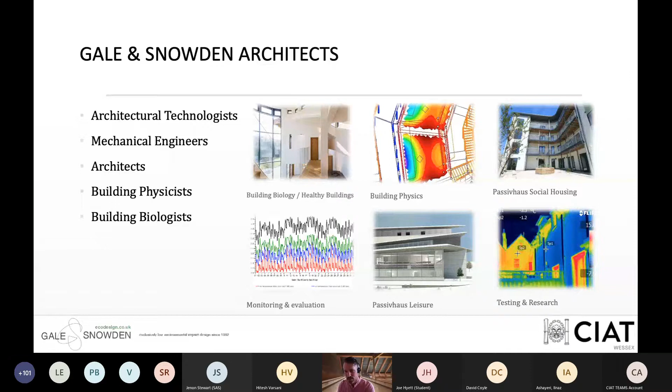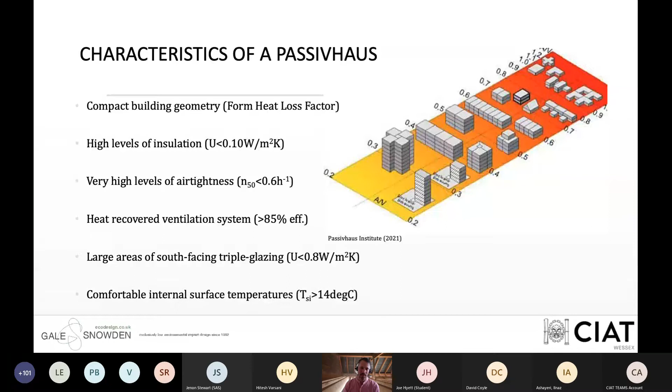High levels of insulation: we beef up the insulation, reduce those U values, and that reduces the transmission of heat. Very high levels of airtightness is a classic passive house requirement.

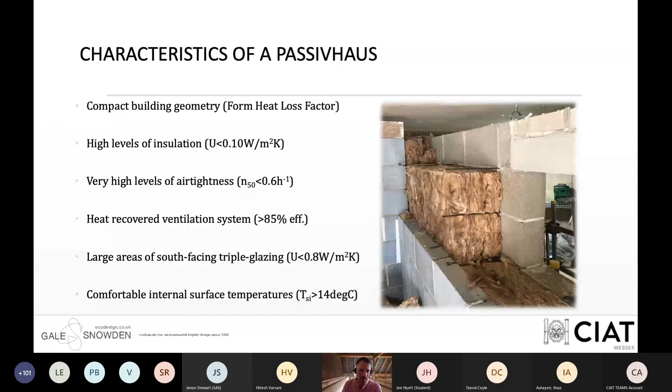So there's our insulation. This photo is taken at St Sidwell's Point, and you'll see 250 mil of insulation stuffed into a cavity. It's not an external wall, it's actually an internal wall that's insulated. It's part of the envelope, but that gives you an idea of just how much mineral wool insulation we need to achieve those U values.

To give you an idea of what 0.6 means in terms of airtightness, when we're looking at residential buildings, you might look at the area of five 20 pence pieces - that would be your typical air leakage in a house. With passive house, the equivalent area across the whole of the building would be a 5 pence piece, and that's all those little pinpricks, dots, tears, rips in your air tightness layer, which needs to be continuous around your building.

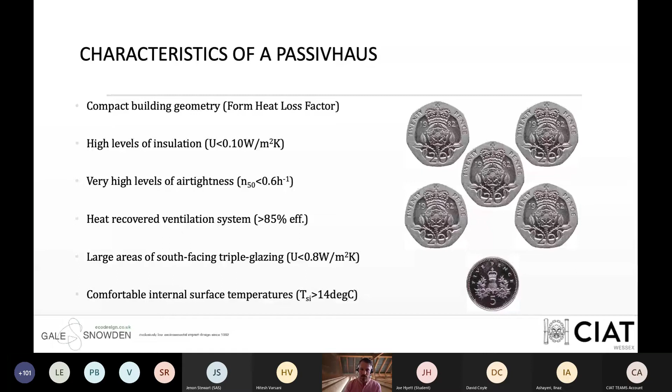MVHR systems, if you don't know already, they are the best technology in the world. In my view, they're just great. You take out some warm air, you take in some cool fresh air, you pass it over a heat exchanger, and you transfer the heat from the warm air that you're taking out from the wet spaces, and you put it into the fresh incoming air to the tune of 90% efficiency. So by getting that temperature gradient across the heat exchanger, you can transfer nearly all of the heat energy to your fresh air that's being supplied to bedrooms and bathrooms, to bedrooms and living spaces.

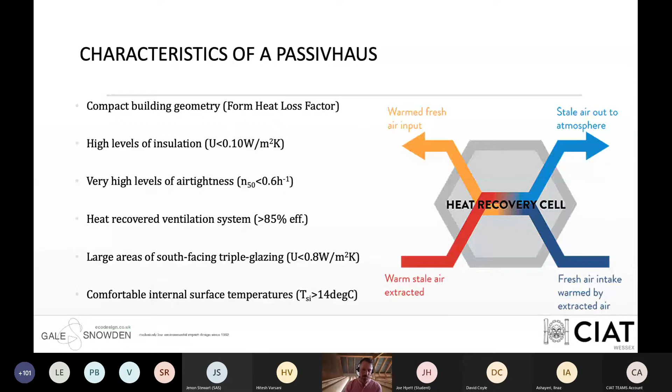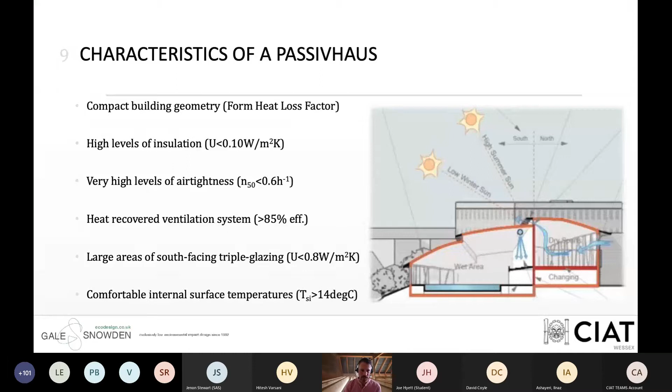South-facing glazing is critical in a passive house, and that's because within certain parameters for overheating, we are trying to get as much solar energy into the building as possible, and that also means reducing the amount of glazing to the north in the northern hemisphere. In the southern hemisphere, obviously it would be reversed, but large areas of south-facing glazing.

And comfortable internal surface temperatures - this is one of the thermal comfort criteria for the standard. It's also part of ensuring decent build quality, but what the Passive House Institute do is they split up the globe into a set of their own climate zones, and they say in this zone you need a minimum internal surface temperature throughout your envelope, and in this zone you need a different one. In the southwest, in the UK, it's about 14 degrees, and that varies from zone to zone.

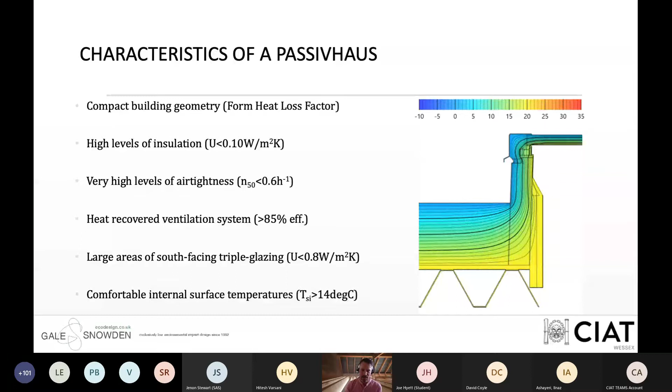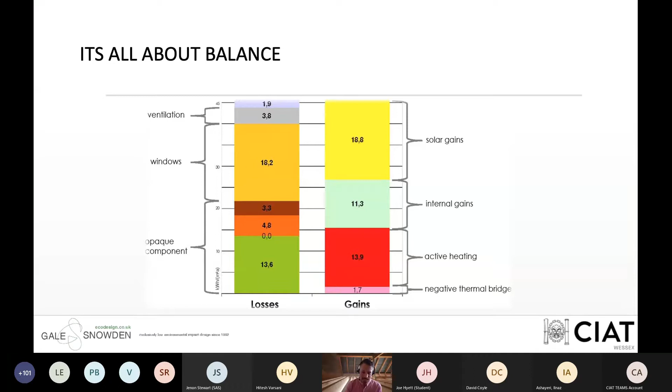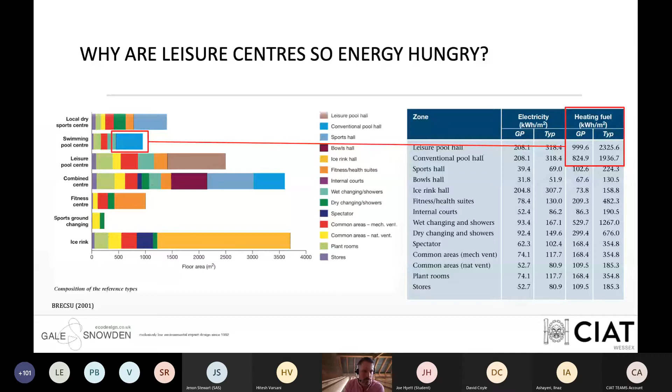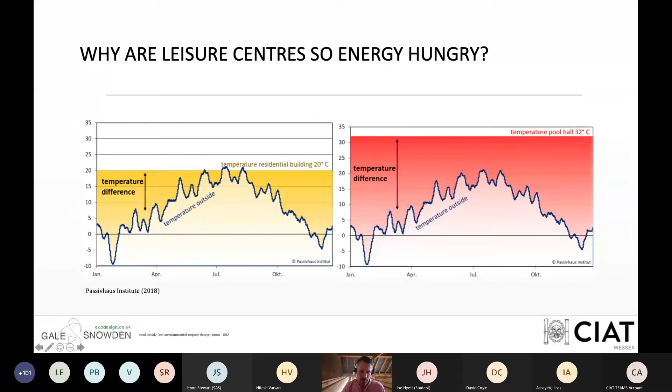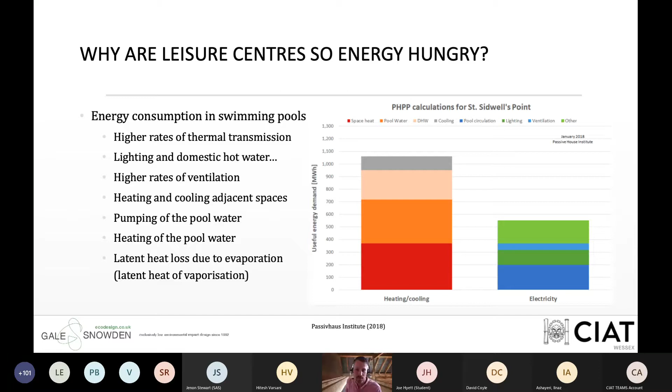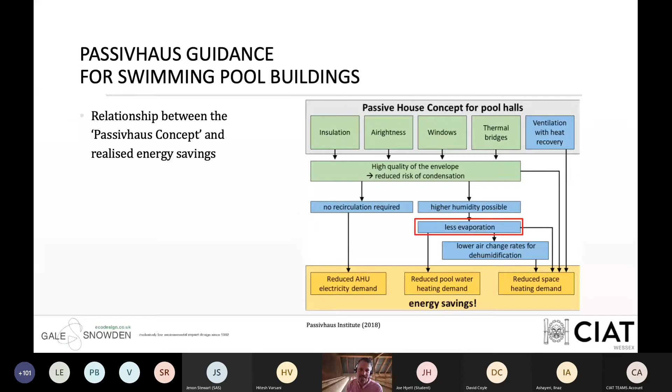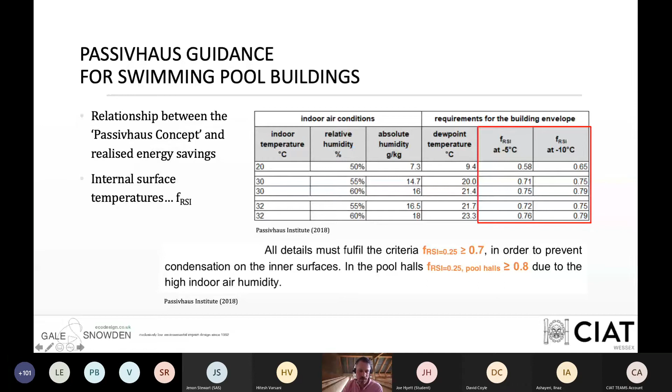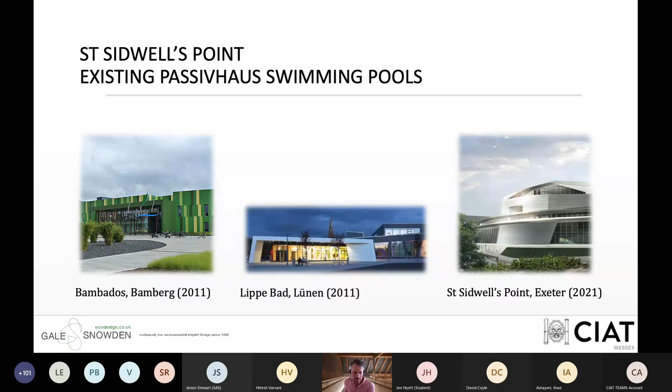St. Sidwell's Point's project value has been targeted at 36 million. To be honest, that's crept up from lower than that at pre-tender, and of course these things do inflate.

The team's client is Exeter City Council—we've done quite a lot of work in the past with Exeter—and Kier are our contractors. I'm not wanting to blow wind or anything, but both teams are epic, they're brilliant, and so far, though we're a few months off completion, they've just been really good to work with.

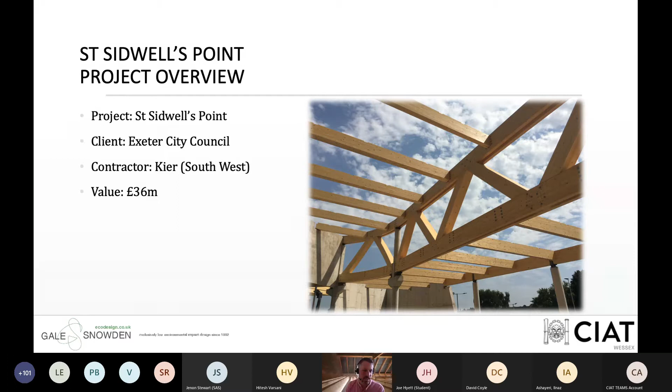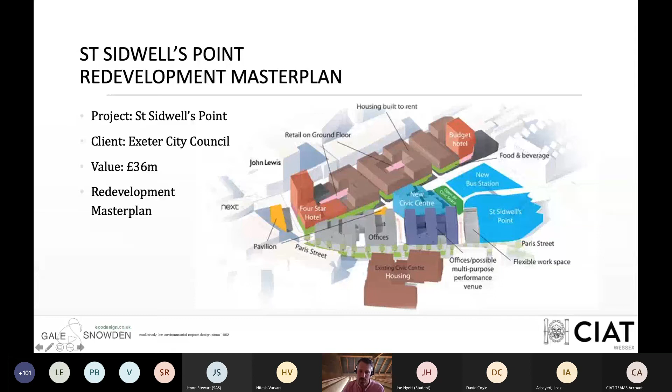Now, Passivhaus isn't the only environmental factor, and of course with standards like BREEAM, we have lots of different criteria and points, but Exeter City Council wanted a facility that was not just a benefit to the local community, but that would be a destination for people all around the country to come and experience for themselves whilst they're away or on holiday, so they can travel down and actually experience a building that's not just very comfortable to be in, but that's also healthy. And we're taking principles from the Institute of Building Biology and Ecology, but also a building that's going to really stand up against future climates of increased temperatures and increased wind-driven rain.

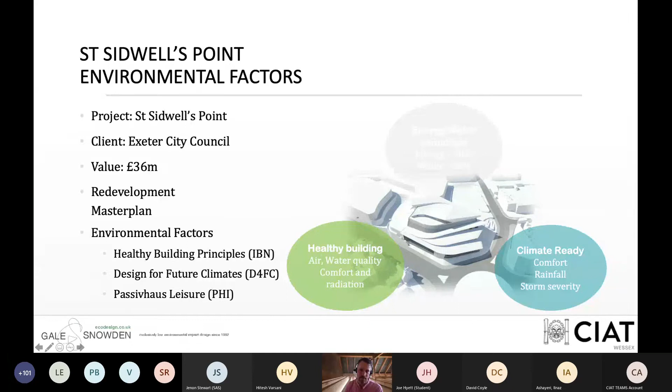So where do you start when you design a passive house envelope for a leisure centre? Well, we obviously have the Passivhaus Institute, they're not just certifying the project, they're setting all the criteria. They're calling the shots in terms of target FRSIs and U values and so on, psi values.

So, well, we literally strategize the airtightness of the whole building, and we recognize where the thermal bridges are in the whole building at the outset. So we're talking about early stage 4, maybe even late stage 3, kind of just working out exactly what our airtightness layers are in every assembly, putting them into a section, labeling them, focusing on the junctions, looking at how we can create continuity, and that in itself is an exercise.

In terms of thermal bridging, there are areas that we cannot influence the design. So under the building, not in this section, but there are places in the building, say, where we have drainage in certain places and substructure walls coming through from outside through our envelope into abutting the back of retaining walls. And those thermal bridges need managing in different ways than just isolating them with thermal breaks.

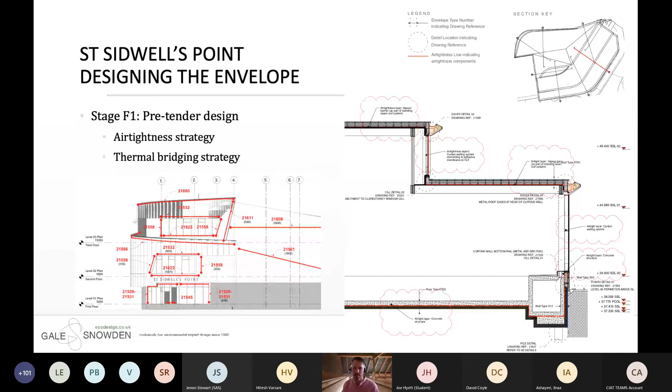This is a list of U values. So these are taken from pre-tender, and this is actually set out by the Passivhaus Institute from their PHPP. And you can see U values 0.14, 0.13, 0.09. We always tend to put a bit more in the roof anyway. But then you have this right-hand column without brackets. The facade brackets have such a significant influence over the envelope, we are factoring them in from the outset.

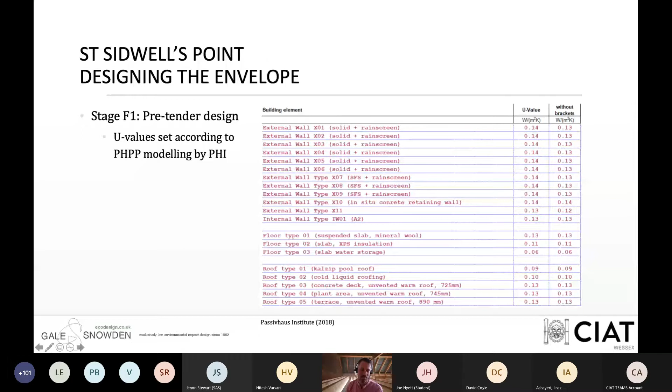Some pre-tender design assemblies. So here we've got 2 examples of wall assembly, and these had stage 1 contractor input. We're not talking about RIBA stage 1, we're talking about 2-stage design and build, so 2-stage tender process. And in these assemblies, we're recognizing where we have fixings from facade brackets, where the air tightness layer is.

So at this stage, we were looking at its tiled plaster finish air tightness line on the lower example. So that was our air tightness. We used that from our experience because it's a really robust airtight layer. You can see it in the finished building, you can touch it, you can see cracks. If someone drills through it, you can actually see where the air tightness perforations are. And then areas where we couldn't have block work, we had metal stud and used the cement particle board as the air tightness layer. Implications of that are that it gets covered up at certain stages, so you need to make sure it's airtight before you cover it up.

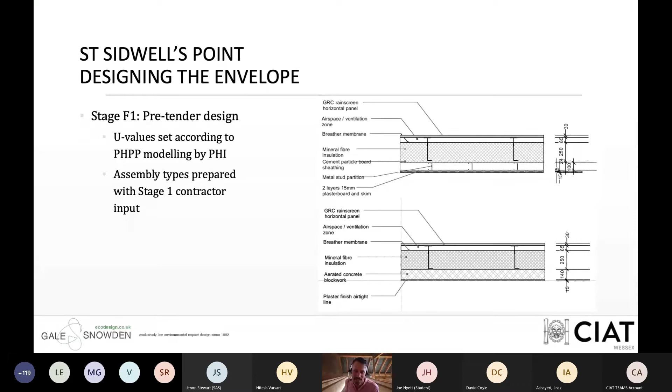Okay, so I think the key point in designing an envelope like this is you can't really do it justice until you can optimize through a process of drafting or designing, assessing that design, analyzing it, and then iterating that design. So you're just repeating over and over again. And that's what we did pre-tender. We went through all the key junctions, looking at how they were put together with some subcontractor input, just trying to understand what the transmission losses were and how we could do things like positioning the glazing in relation to the insulation and designing the support for the eaves in a different way.

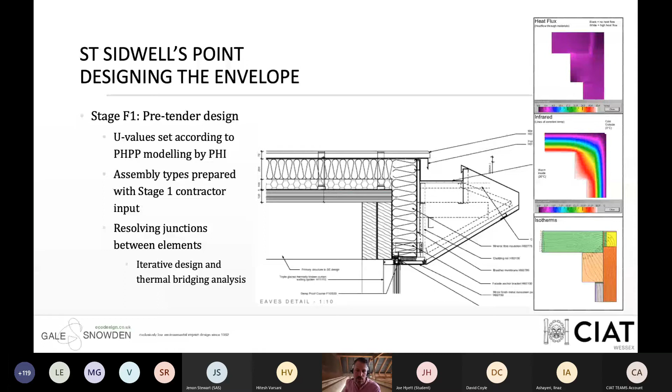Inevitably, when the contractor comes on board proper and we start site, there are changes that occur, and there were many changes that have happened since Kier came on board. This isn't a definitive list, but for example, one of the first things that happened was Kalzip stopped producing the specified product for the standing seam. So Euroform was put forward, and of course we had to assess that against the environmental factors or the Passivhaus requirements. There was a change to 12mm cement particle board from 24, and that was because of health and safety and cutting on site and the weight of the boards. And there was a massive push to change the majority of the wall areas which were rendered blockwork to metal stud work.

When it's coming down to program and the contractor needs to speed up, you understandably have to work on some level, despite the risks, to find a way of changing the design. So we increased the areas of metal stud work, and that helped them work in the way they were more used to working.

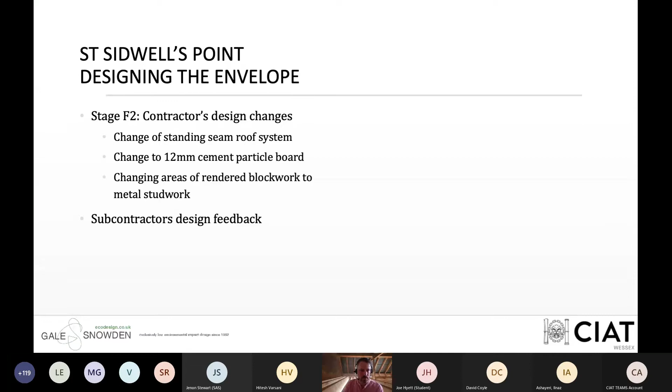One thing Kier did that I really liked was produce a mock-up in a room on site, an old room out the back of the bus station. That allowed them to test the design in a couple of ways - not to validate the design, but to look at buildability, to pressurize it and look at air leakages, to educate their team, and to try to work out where they could make their own improvements on the design to reduce their risk.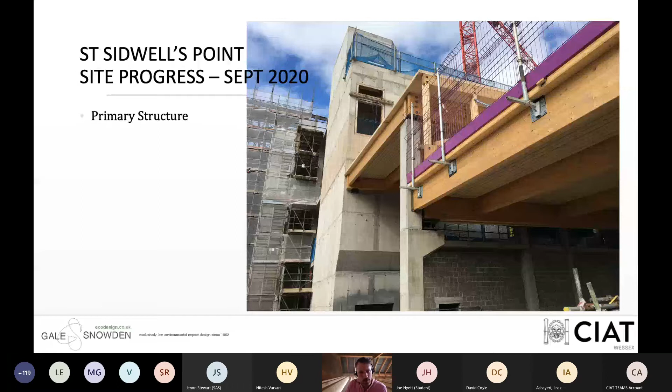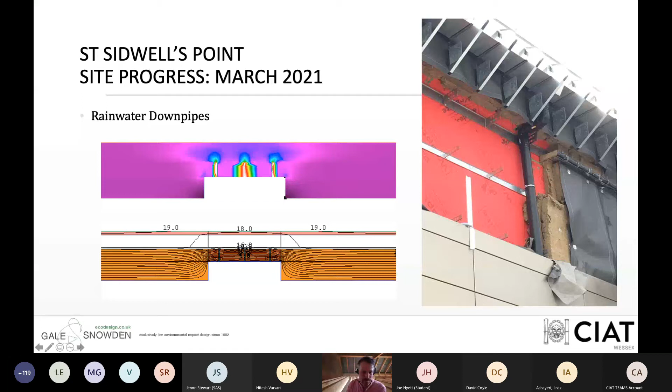This was a remodel during construction. This is where we had a few unexpected changes for the curtain walling screen that you can see from the roundabout if you drive around that way. The curtain wall was originally further inboard, and one of the things we always try to do with Passivhaus windows is get that glazing as close to the center of the insulation as possible, because it reduces the thermal bridge as well as over-insulating the frames.

At an early point during construction, the back boxes increased in depth because the supplier, the subcontractor, had recognized that their back boxes modeled pre-tender were actually too small for the wind loads imposed on that screen, so they increased to the next size up. That added 50 millimeters, and then the subcontractor themselves wanted to pull the curtain wall screen off the building so they had space to get their hands through and fix it in certain ways. That pushed the glass right out beyond our insulation zone. So remodeling, looking at how we can fix cladding in certain ways, and trying to reduce the impact across the envelope, was part of that process.

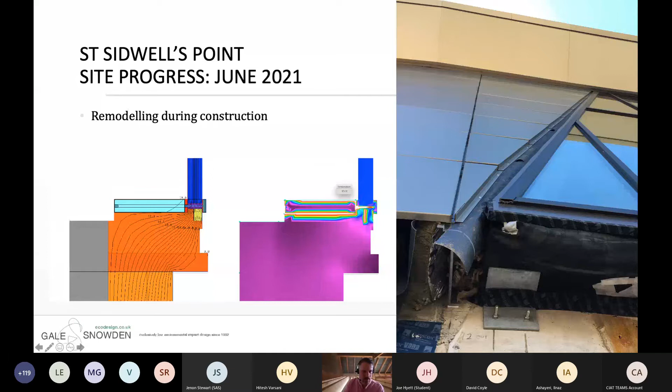Some photos of curtain wall installs - we've got installs with different fixing methods. On the right we've got the spigot plate bracket, where we're taking the EPDM as the airtightness through into the reveal to link it through with other airtight elements. In this case we're taking everything through so it can be inspected from the inside across all the curtain walls. Here on the left it's a different fixing method - we're bringing the airtightness up from the roof below, and not taking it through to the inside, just straight up to the seal at the sill.

Then at the top, something that we as designers don't tend to think of is the impact of temporary works. Those temporary works needed taking off before they could complete the airtightness, bringing that down to the seal.

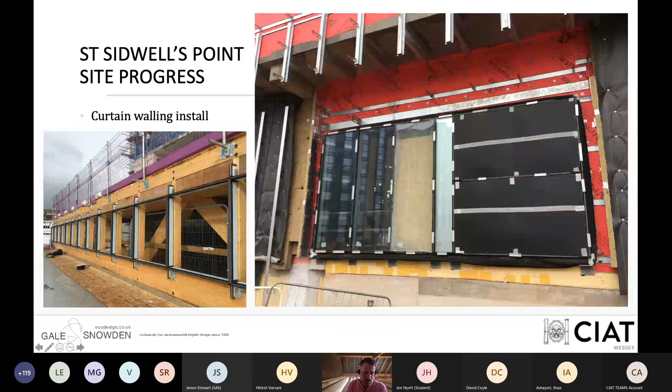The spigot plate fixing methods - on the right, obviously, and on the left we can see that EPDM coming up through. It's just been left hanging for now and taped to the sill, to the concrete. On the right, that EPDM isn't in place, but that would just be dressed up and over.

So what lessons have we learned? I think the biggest lesson of all comes down to airtightness testing. When you design a building like this - and the design was done by another company, another member of the integrated design team, Space and Place - you need to have an appreciation for how it's actually going to be tested, how it can be split down for sectional testing, how you can isolate certain areas to test them, partial testing, interim testing.

Big contractors tend not to want to close down a site to test. With a house you just have a testing day, but with a big building like this your work is progressing through the building all the time, and to turf everybody out for a week whilst you test and find all the leaks isn't something the big contractors program for. That's something we as a design team hadn't appreciated, and I don't think the contractor had appreciated it at tender either. As for the value of the two-stage design and build process, maybe a lot was actually lost in the transition from one contractor to the next.